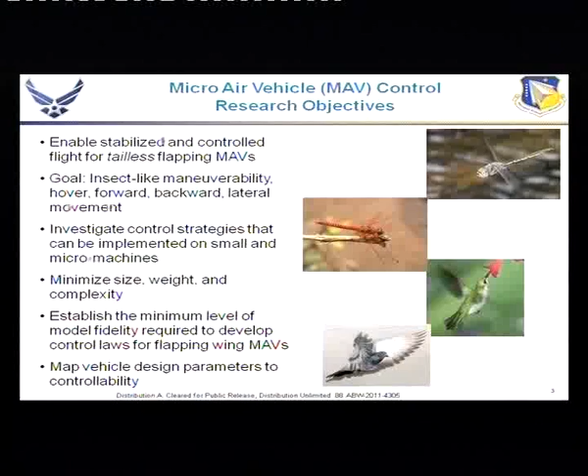One thing we as controls engineers have to keep in mind is that these things have severe size, weight, and volume constraints. When you want to implement your control system on such a device, you have to be very careful not to make it too complex. In fact, some of the low-level controllers we've developed so far have to make use of integer arithmetic, so all the complicated trigonometric functions have to be computed offline, coded in integer form, and make use of hardware multiplies and divides on board small chips in order to make it viable to fit within the size, weight, and complexity limit.

Another objective of our work was to determine the minimum level of fidelity needed to develop a control law for such a vehicle, one that performs well. We don't want coupled computational fluid dynamics or structural grids that take long times to compute. We're really interested in capturing the major effects and letting the magic of feedback control account for the uncertainties in the aerodynamic model. Finally, we want to map the vehicle design parameters back to controllability - that's also important.

So let's look at a couple of examples from nature to get a sense for how things fly. This is a video of a hummingbird here. You can see the majority of the wing motion occurs in a plane - there's a stroke plane defined by the wing sweep. Now, it's not to say there's no out-of-plane twisting. In particular, if you look at the twist of the wings, as the wing comes forward, the wing is twisted such that it has a positive angle of attack and is producing positive lift.

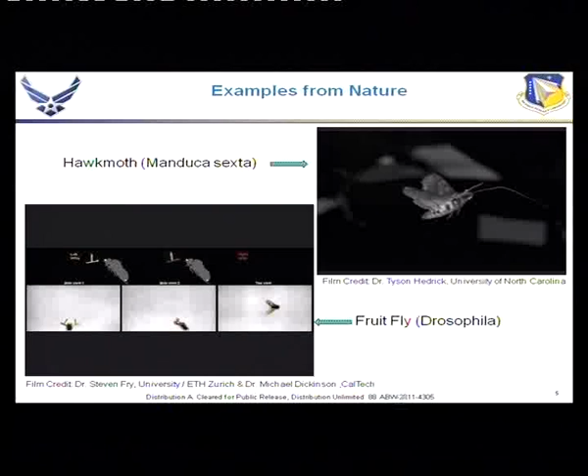That's another key feature of a flapping wing vehicle: the aerodynamic forces are oscillating, not steady. So any attempt to control a vehicle like this using a steady control idea is not going to work. You have to figure out a different way to handle this.

We'll look at a couple of examples of biomimetic flapping vehicles. This vehicle was built at Wright State in Dayton, Ohio, and it's not unlike the vehicles built at TU Delft, the famous DelFly, which was one of the first to take flight. This vehicle makes use of a clap-fling mechanism and is tail controlled. You can see a rudder and elevator here, and a throttle controls the speed of a DC motor, which controls the flapping rate. This aircraft is essentially flown just like an airplane by an RC pilot, except that the propeller is replaced by flapping wings.

So it might look bug-like, but it flies completely differently than a bug.

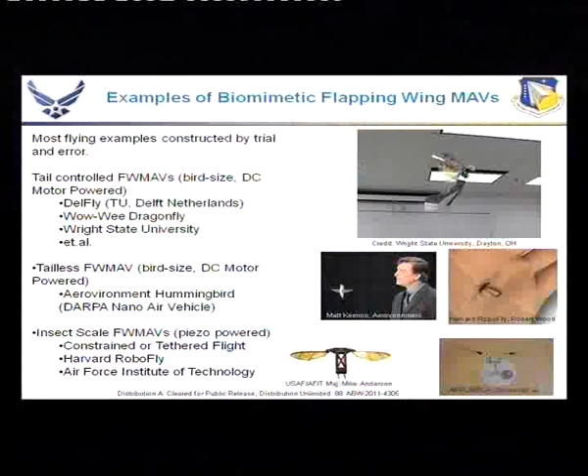Now, within the last year, a company in the United States called Aerovironment produced the first tailless controlled flapping wing vehicle, the small hummingbird here, shown with its creator Matt Keenon. This aircraft flies very much like a hummingbird.

The control strategy here is to change the angle of attack on the forestroke and the aft stroke. The wing will travel forward at a different angle of attack than on the aft stroke, and in that way you can create differential cycle-averaged drag forces to control the aircraft.

So there are several different ways of controlling aircraft. That's just one of them, and we'll talk about several of them today.

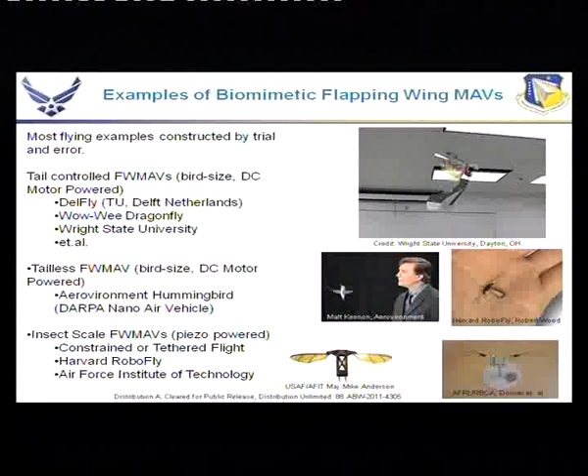I will note that this vehicle was designed largely using a trial and error approach, more reminiscent of Thomas Edison. They produced about 200 wings before they found a set that would actually work. Much of what we're doing is trying to put a more systematic and scientific approach in place, whereby we can design vehicles with different control strategies, sizes and shapes, without going through such an extensive trial and error process.

At the other end of the scale, we have the 60 milligram, 3 centimeter wingspan Harvard RoboFly. This aircraft is piezoelectrically powered, and we'll talk more about that shortly. This was the first aircraft to produce excess lift, and it did so on a tether, flying up a pair of wires without being controlled in any way.

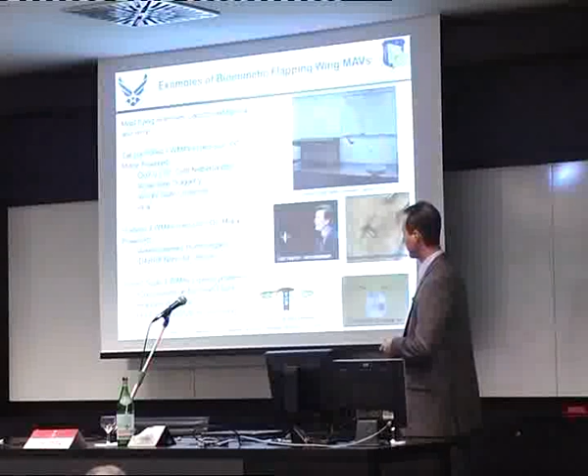Another aircraft we'll talk about at length is a 2-actuator version of this, wherein the wings can be independently varied. This is one that we built at AFRL, a mesoscale vehicle that will be undergoing air table testing for maneuverability as a precursor to free flight.

I wanted to talk about passive wing rotation because it's a key feature of many biomimetic flapping wing MAVs. One notable exception is the Festo SmartBird, which makes use of active twisting, synchronized with the position of the wings through sensors in the DC motor. But in the interest of keeping the design simple and preventing large inertia loads from an actuator moving in the wing frame, passive wing rotation is a good way to get around those problems.

So here you can see what passive wing rotation looks like, the general principle. The top picture shows how the Harvard RoboFly works.

It's basically a pair of two sheets of carbon fiber that sandwich a flexible material, and as dynamic pressure hits the wing, it bends, and it can't bend too far because there's interference between the two carbon fiber plates. So it works a little bit like a door that would be designed poorly such that it can only open up part way.

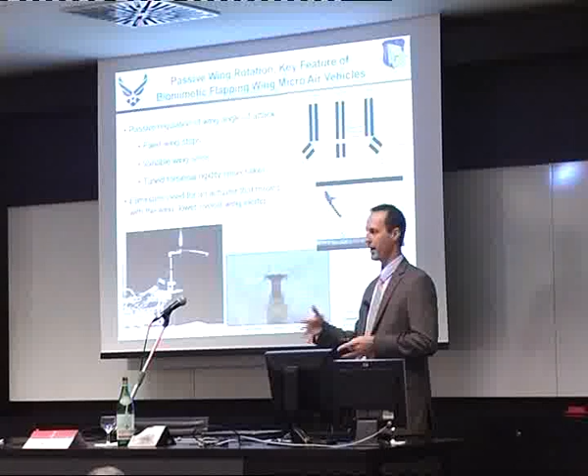But what that does, it gives you the ability to produce positive angle of attack on the fore-stroke and the aft-stroke and provide lift. You can see here another model on a test stand that's got this passive rotation component in it. This is video from our lab. And here's a video from the two-wing piezoelectric vehicle at EPFL under strobe light, so you can see the passive rotation working there.

All right, so let's look at the differences between flapping wing aircraft and conventional aircraft, like fixed or rotary wing aircraft. A typical flight control engineer is accustomed to having continuously variable control inputs that he can apply to his vehicle. They'll produce steady forces and moments. On the flapping wing side, a conscious decision was made to flap, and therefore you have nothing but periodic forces and moments to work with.

So as I said before, any attempt to control the instantaneous aerodynamic forces on these wings in order to control it is doomed to failure, because the aero forces are going to peak at roughly mid-stroke, and they're going to be very near zero at the ends of the stroke.

So at first this looks like an undesirable feature. However, before the end of the talk today, you will see how it's possible to control multiple independent degrees of freedom by controlling various parameters that govern the nature of the strokes.

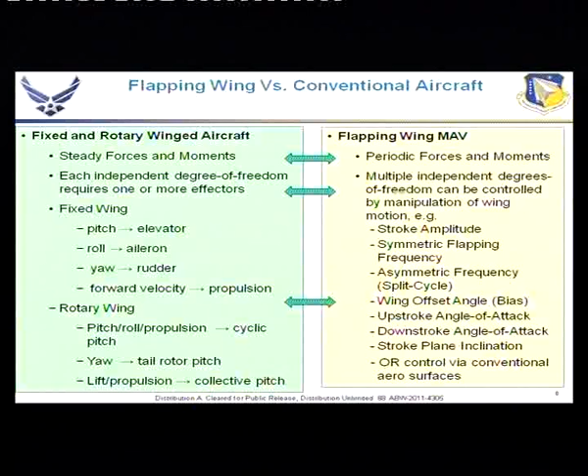So with conventional aircraft, every independent degree of freedom requires at least one actuator. Typically you have pitch controlled by elevator, roll by aileron, yaw by rudder, etc. On the rotary wing you have cyclic pitch on the rotor, tail rotor pitch, and collective pitch to control the vehicles.

All right, so the first thing that we looked at early on was the Harvard RoboFly. This was a piezoelectrically driven aircraft, and as I said, that was uncontrolled. It used a single actuator and just demonstrated the ability to produce excess lift.

So it was obvious that with a single actuator it would be impossible to control multiple degrees of freedom, but we asked the question, what if we split that actuator down the middle so that we have independent control over the left and right wings, and we leave the passive wing rotation joints in place?

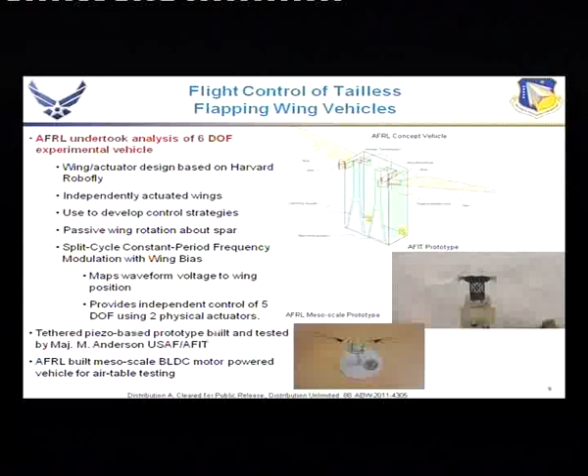So to give you some idea of how the thing works, the piezoelectric actuators are mounted to a carbon fiber substrate. So when you apply a voltage to this substrate, it induces a strain in what is in effect a cantilever beam, and it produces a relatively small tip deflection.

But this folded origami-like carbon structure is the equivalent of a slider crank type of linkage that produces a relatively large angular displacement for the wing for a relatively small tip displacement. So that's essentially how these things work.

And by independently actuating the wings, we looked at different ways of controlling the wings to see what we could do in terms of controlling the motion of the body of the aircraft. So this was our starting point.

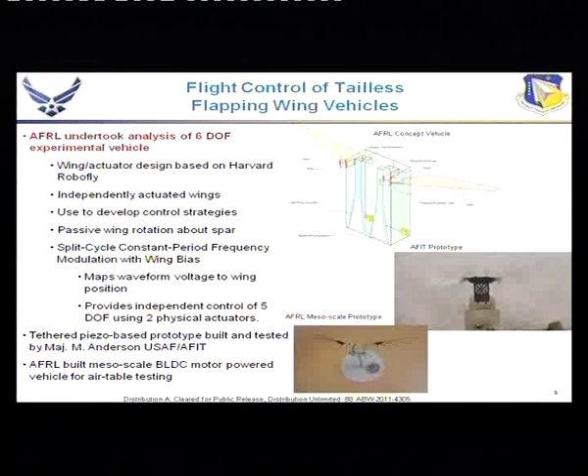And I'll talk today about one control strategy that we call split cycle constant period frequency modulation with wing bias. And you'll see how you could control 5 independent degrees of freedom using 2 physical actuators. So that's not to say that there's not more inputs to the system.

There are about 6 inputs to the system, but there are only 2 physical actuators in place that interpret the commands. We have a tethered piezo-based prototype shown here that was built up at AFIT based on this original concept. And then we have a mesoscale brushless DC motor-powered vehicle that we built at AFRL for air table testing.

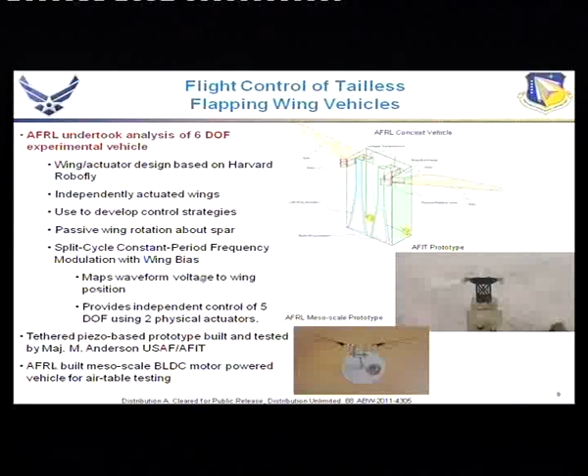Next I'm going to talk about control-oriented modeling. I mentioned earlier that aerodynamicists are very interested in these problems because there are a lot of unsteady aerodynamic phenomena at play—leading-edge vortex effects, wake capture effects, and many others. So the question is, how many of these effects, if any, do you need to model in order to develop a model that would be good for designing a control law?

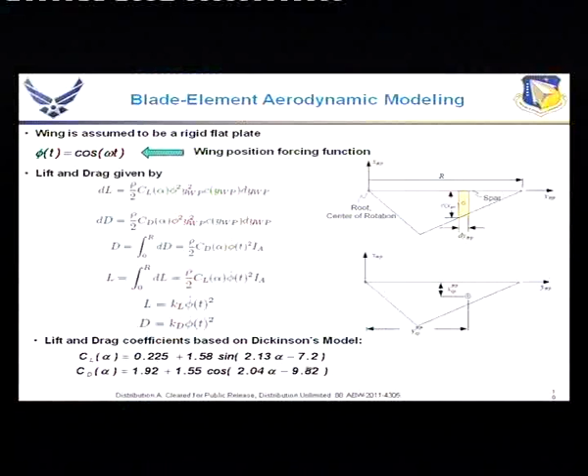So we start with one of the simplest forms of modeling, called blade element modeling. If you look at how blade element modeling works, you basically divide the wing up into an infinite number of strips, doing everything continuously with calculus rather than discrete approximations. The most basic oscillatory form for a rigid flat plate that's flapping would be a cosine wave. At the foremost position, the cosine would be 1, and at the aftmost position it would be -1.

Phi is the angle that the wing makes in the stroke plane. Blade elements near the root experience lower dynamic pressure than those at the tip, because tip velocities are higher—this is a rotational type of motion. You can look at the differential lift and drag across these blade elements, integrate them, and the lift and drag forces become proportional to the area moment of inertia of the wing about the axis of rotation. In terms of the motion parameter, they're proportional to the square of the angular velocity in the stroke plane.

At the bottom, we have lift and drag coefficients that are empirically determined from mineral oil tank tests at Caltech. These have been found to reproduce aerodynamic lift coefficients rather well for low Reynolds number flows. When they did the test, they used big plexiglass plates in a mineral oil tank, which aerodynamically scales to something small moving in air.

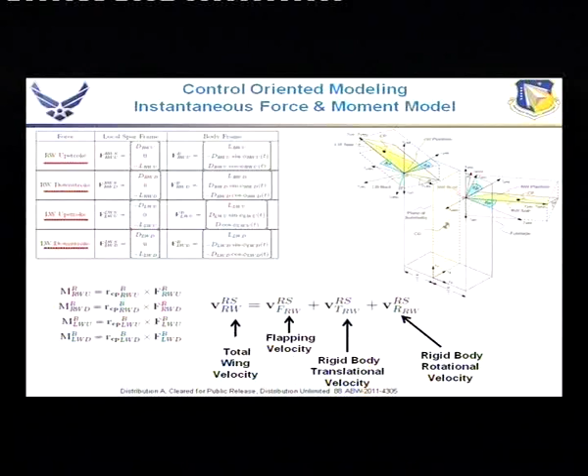If you were a flight control student, you would expect a flight control model with steady forces and moments acting on it. But when you're looking at flapping wing vehicles, the flight mechanics become quite different, because you have to consider the forces and moments produced by the left wing and the right wing separately from each other—there are sign differences between the two, and they can behave differently on the upstroke and the downstroke.

So here we have what constitutes an instantaneous representation of the blade element model, showing the X, Y, and Z forces in the body frame. In flight control, we like to translate all these forces back to a body frame and design controllers from there.

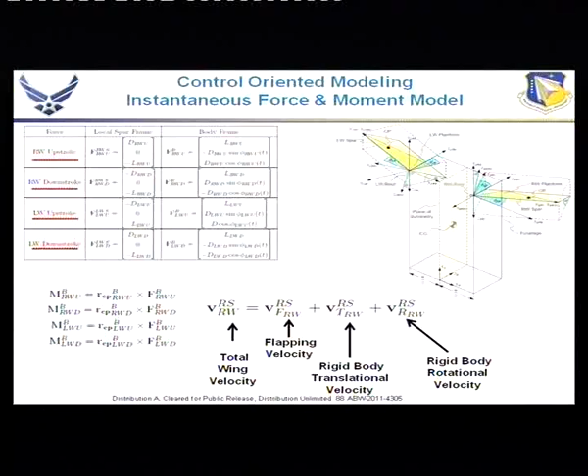One thing you'd notice here is that there are coordinate transformations involved—there's a sine of phi of t, but phi of t itself is a cosine wave, as stated earlier, its most basic form. So now you have things that look like sine of cosine of omega t, and later when we do integration to cycle-average these forces and moments, it gives rise to some interesting functions you don't normally encounter in flight control. The instantaneous moments, which are periodic, are just cross products of the position vector with the force vector.

We also include the effects of rigid body translational and rotational motion on the flapping wing motion. So not only are the wings flapping, but if the wings are moving forward with the body, you're picking up velocity components from that as well.

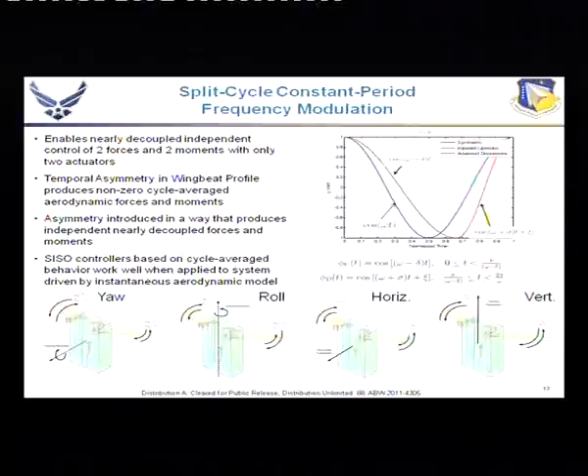If you look at what happens with the drag, the drag would be the same in the forestroke as the aft stroke, but in opposite directions, which means the cycle-average drag would be zero.

So the aircraft motion would exhibit a limit cycle. The aircraft would pop up twice per wing beat because of the lift, and for drag, it would move forwards and backwards, or lurch forward and stop, lurch forward and stop - those types of behaviors.

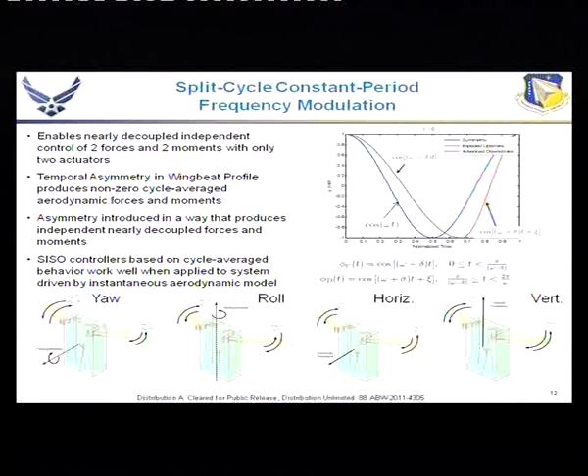Now, with just two physical actuators, we ask: what happens if we slow down one stroke relative to the other? You still get positive cycle-average lift - that doesn't change. But what does change is that the cycle-average drag becomes different, because the drag directions are opposite on the forestroke and aft stroke, but the magnitudes differ, since the dynamic pressure is different on the forestroke relative to the aft stroke. So temporal asymmetry in the wing beat profile can produce non-zero cycle-average forces and moments.

So if we look at the 4 degrees of freedom that could be controlled with two physical actuators: if you increase the flapping frequency, which we call the symmetric flapping frequency, on one wing relative to another, you'll get more lift on one side than the other, causing the vehicle to tilt.

If we look at the horizontal case, if you flap the wings hard on one stroke and slowly on the other stroke, you will advance further backwards than you will forwards. This would be like getting in a swimming pool and doing a hard backstroke and then a light forestroke without taking your hands out of the water.

Roll can be done the same way - hard forestroke, light aft stroke - but done differentially left to right. And for vertical force, you can just increase the flapping frequency to go up and decrease it to go down.

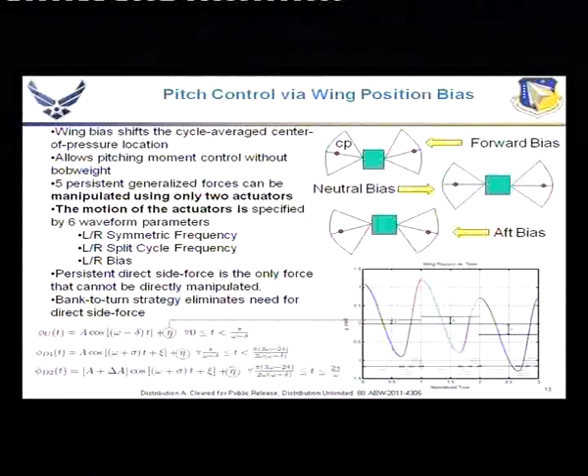By introducing this bias, the waveform that drives the wings now looks like an amplitude times the cosine of omega minus delta. Delta is the split cycle parameter that slows it down, and eta is the bias that changes the cycle-average center of pressure location. With a little bit of care, you can construct waveforms that are at least position-wise continuous, so you could actually implement such a thing.

So now the next step: we've talked about the instantaneous aerodynamic models, but remember that we can't control the instantaneous forces and moments. So we look at cycle averaging.

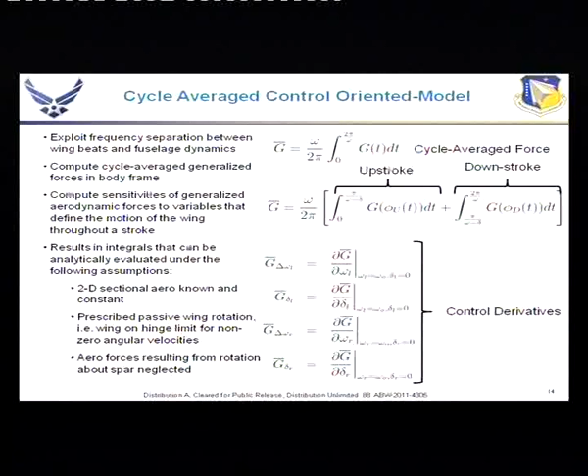Because there is quite a bit of difference in frequency between the rigid body modes of the aircraft and the flapping frequency, we do the cycle-averaging. So now you look at the cycle-average generalized forces, which are obtained by integrating an instantaneous aerodynamic force or moment over a wing beat and dividing it by the period. Because the upstrokes can behave differently from the downstrokes, you have to carry out the integration separately. But in the end you can calculate these integrals analytically, and I'll show one example of how to do it.

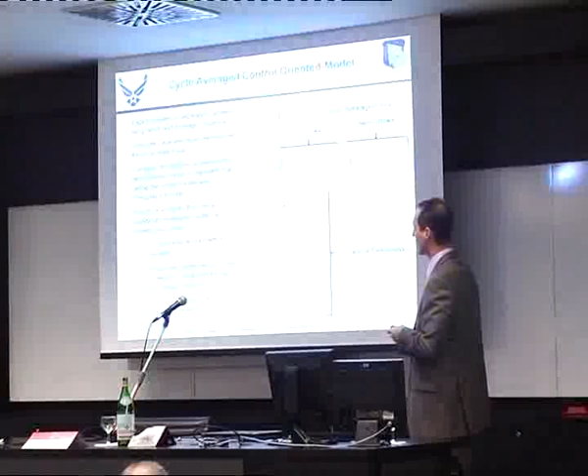You can analytically calculate the sensitivities of the cycle-average forces and moments with respect to the control input parameters available - here we have the symmetric frequency you can change, and the split cycle parameter, as examples. As I mentioned earlier in the instantaneous model, we have a lot of interesting functions popping up, like sine of the cosine of omega t, or the cosine of the cosine of omega t.

And it turns out that these give rise to Bessel functions and Struve functions. The Struve functions turn out to be zero, but the Bessel functions are non-zero. As you're carrying out these integrations, you'll encounter these unusual functions in flight control.

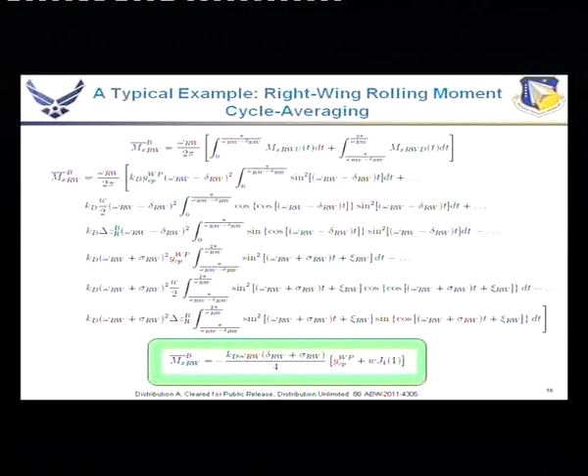So if we just look at one of the integrals, the cycle-averaged rolling moment produced by the right wing written in the body frame, there's the upstroke integral, the downstroke integral, the expansion of it. But in the end, the form of it's rather compact.

And what is nice about it is that the vehicle design parameters appear in it. So this YCP is the center of pressure location of the wing, written in the wing plane. This W is the width of the aircraft, and your control parameters appear here as well.

So now you have some equations that you can work with to see how you might change the design of the vehicle to make it more amenable to control. So it allows you to look at control early in the design process. Many people here probably suffered from people designing systems first without ever asking a controls engineer, and then coming back later and asking you to control it, and you've got problems. So it allows us to look at control early on.

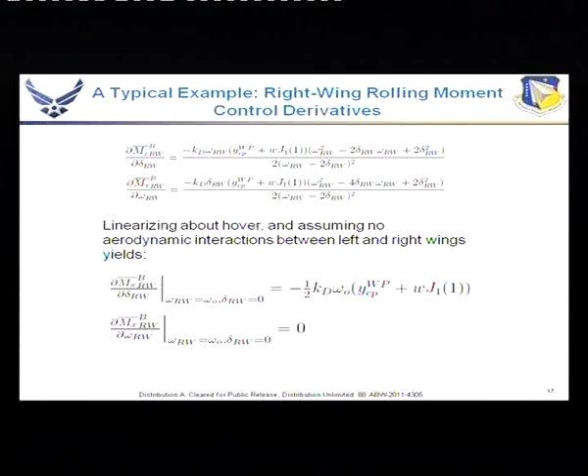To calculate the sensitivities is pretty straightforward. It's just the computation of the derivatives, and the end result gets even simpler if you look at a linearized condition about hover.

So if we get to the end, each one of those cycle-averaged control derivatives forms an element in your B matrix. So if you're accustomed to linear control, you like to know what's in your B matrix, and at least you want to get the sign right, because if you don't have the sign right, the feedback loop will have the wrong sign. You could be destabilized.

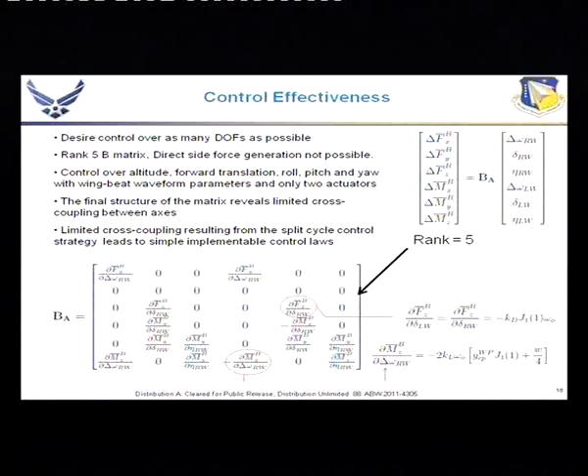So this B matrix here effectively tells you what the changes in the cycle-average forces and moments are relative to changes in the symmetric frequency, the split cycle parameter, and the wing bias associated with the left and right wings.

And one thing that we can see from this matrix, it turns out by inspection you can determine that it's rank 5. One good thing about the matrix is that it's relatively sparse, but not too sparse, which means that there's a lot of input decoupling here.

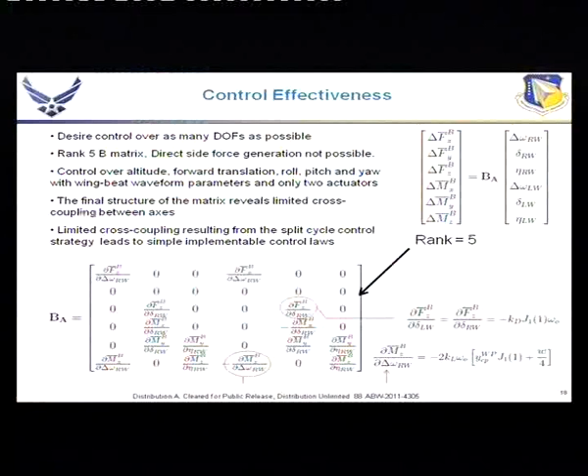This control strategy yields a lot of input decoupling, and so that means that the control law doesn't need to be as complex as it might have to be for something that chose a different control strategy. Everything here is written in terms of the right wing because there's some symmetries and asymmetries due to left and right. But again, the Bessel functions and the design parameters show up in each individual element here.

There are 36 elements, but you need to calculate 108 integrals in order to get your 36 elements. So it's a rather involved process, but we believe worth it in the end.

The one row of all zeros means that you can't control the cycle-average side force on the aircraft. So that's one thing that you couldn't do. But it really doesn't matter, because if you want to maneuver in the lateral plane, you can always roll and translate, or bank and translate. So you can have a higher level control loop taking care of that.

So once you have such a model, we'll look at how you might implement a controller for something like this. And the easiest thing to look at is a very simple one degree of freedom altitude tracking problem here, and looking at what the physics are.

This is basically the Harvard RoboFly on the pair of wires that moved vertically, and this is modeled by a point mass with just gravity acting on it, and a time-varying lift force. So this lift force has the form of sine squared omega t. Sine squared omega t has two positive peaks in it, indicating the two bursts of lift that you get at mid-stroke.

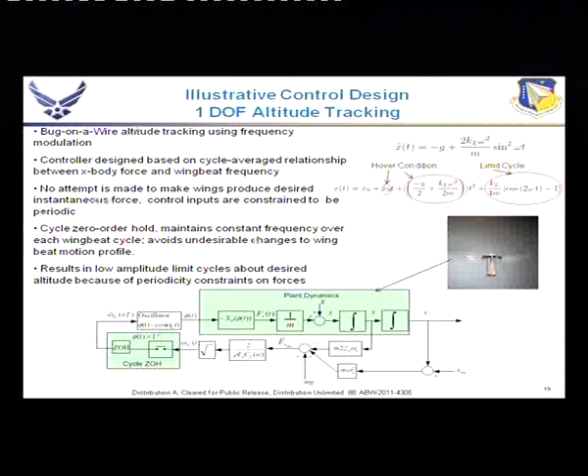If you look at the analytic solution to the differential equation, you can see that the aircraft will stay in the vicinity of its starting point if certain conditions are met. One of them is that the initial velocity is 0, and the other one is that the cycle-average lift is equal to the weight. This term circled here is a statement that cycle-average lift equals weight.

The one thing that all the cycle averaging doesn't tell you anything about is what do the limit cycles look like.

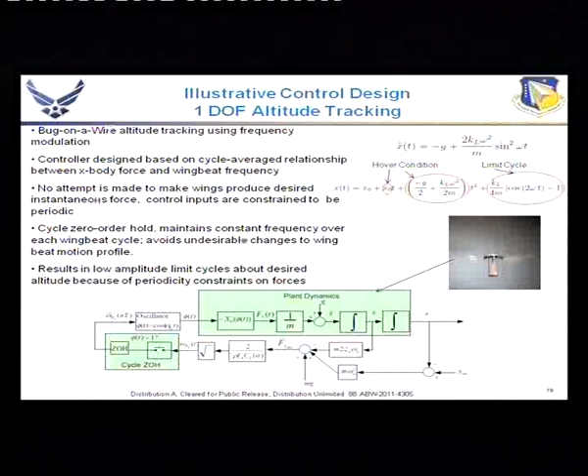And the limit cycles in terms of position have the form of cosine of 2 omega t. Again, you get two positive bursts of lift that cause that. So let's look at what you would do if you wanted to control the altitude of this aircraft on these wires. If we had the ability to measure the altitude rate and the altitude, we could, in concept, produce a control law that turns this double integrator plant into a damped harmonic oscillator.

And that's only if we could produce a steady force. But we can't produce a steady force, as we said before. But there is a mapping between the cycle-average forces and the form of the waveform that's oscillating the wings. And that's what this block diagram is basically doing, inverting the relationship between cycle-average force and frequency. Again, there's a quadratic relationship between this cycle-average force and the frequency of the wing, and that produces a

oscillator frequency command. Now, there's a cycle zero order hold in place, and as opposed to a conventional zero order hold that works on a fixed clock, we look at where the wing beat is in the stroke plane, and we only update the frequency to the oscillator once each wing beat. And in the end, you produce a frequency command to the oscillator that drives the wings, that produces an instantaneous force, but it has a cycle-average force that satisfies one of your necessary conditions for hover.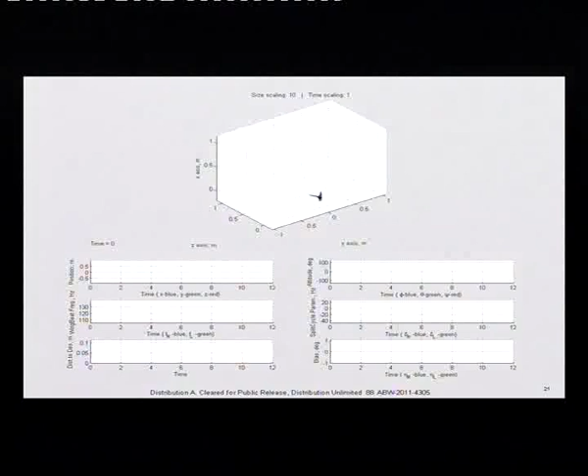So this is a simulation of a flapping wing vehicle. If you listen closely, you can hear something that's buzzing. That's the waveform that's being applied to the actuator, piped through the MATLAB sound generator. And there's really no modifications made to that. It was interesting to hear it because it does sound a bit like a bug. There's kind of a warbling sound and a buzz going on.

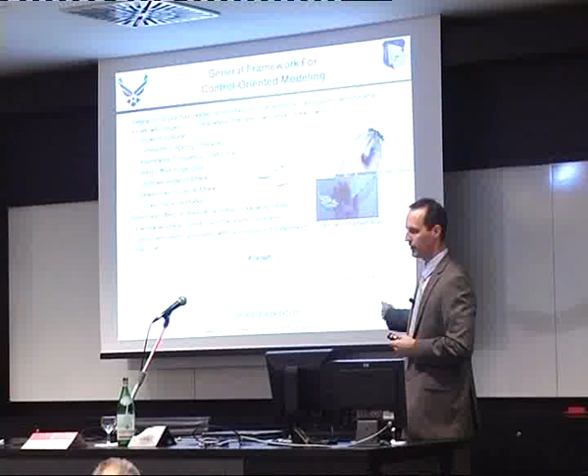But in this case, the cycle-average control model is being applied to a model of the vehicle that's being influenced by the instantaneous forces and moments. So we're not really testing the controller on the same thing that we designed it for. It includes the periodic effects of the forces and moments. So this is basically the first step in validating that such a controller would work. Incidentally, that simulation also included some unsteady aerodynamic effects. We have what we call phase index table lookups that account for differences in the lift and drag coefficients throughout the stroke. So some of the unsteady aero is included in that as well.

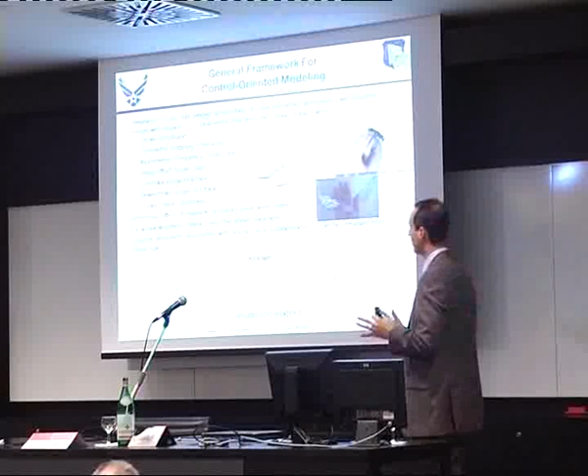We have now generated a general control framework for control-oriented modeling in that we haven't just looked at the split cycle, the symmetric frequency, and the bias, but we've also looked at the effects of changing stroke amplitude, upstroke and downstroke angle of attack, and stroke plane inclination. And many different implementations of flapping wing vehicles have been proposed. Here's another variant of the RoboFly where the line of centers of the linkage is changed. And the effects of these actuators can cause different types of behavior in changes in the amplitude, bias, angle of attack, etc. And you might not have direct control over these parameters. Some mechanism may be in place to take care of it.

So we have gone through and calculated cycle-averaged control derivatives for amplitude, frequency, split cycle, etc. And a lot of work went into that. So many integrals were calculated and many derivatives were calculated analytically. But if you go to a new design that hasn't been conceived before, there are geometric relationships which tell you how the amplitude might change with respect to some servo control input, or how the frequency might change, or the split cycle parameter could change. And those are design dependent.

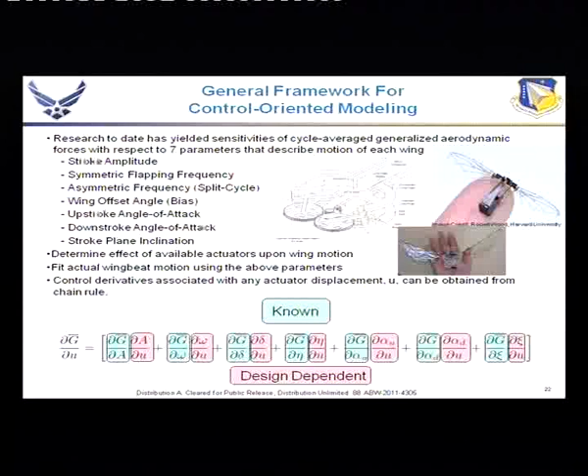They can be computed as a secondary process. Usually they're just geometric relationships, and you can get them. But by using a multivariable chain rule, you can compute the change in the cycle-average force or moment relative to any type of control input you might have at your disposal.

Another thing that came out of the work so far is what should the designer of a flapping wing vehicle be looking for in terms of controllability? This goes back to the problem of thinking about controls last. We need to think about that early in the process. And so some very simple necessary conditions fall out of the work.

It basically says that the cycle-average lift has to be equal to the weight, and all the other cycle-averaged forces and moments have to be equal to 0 in order to stay near the equilibrium point. So what you can do when you're designing a vehicle is to try to enforce as many of these things as possible for your neutral control condition. This is like trimming an aircraft.

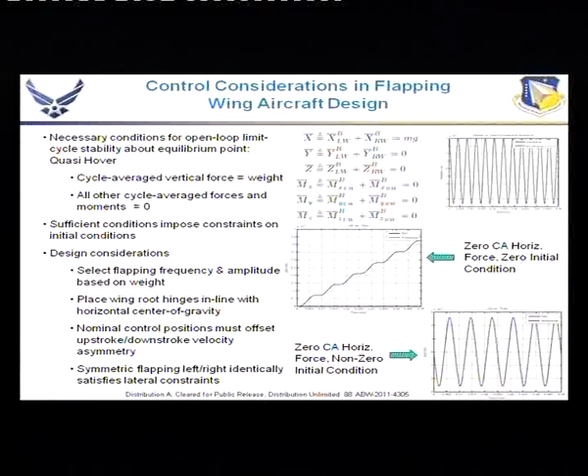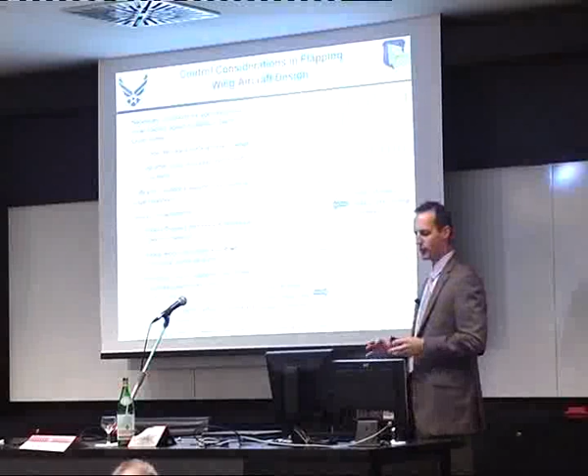You can select your flapping frequency and the amplitude of the flapping based on the vehicle weight. Another thing that you can do is to place the wing root hinges in line with the center of gravity. That way, when the aircraft powers up, it doesn't have an immediate tendency to tilt or pitch forward and move away from equilibrium.

And the nominal control positions have to be offset in order to compensate for any upstroke or downstroke velocity asymmetry. We talked mostly today about the piezoelectric powered aircraft, but when you have DC motors driving 4-bar linkages or nonlinear linkages, you can get different velocities on the fore-stroke versus the aft-stroke if you run the motors at constant speed. So in those cases, you need to compensate for the velocity asymmetry for trim using other mechanisms.

All right, so these are some results that were produced at Wright-Patterson Air Force Base at the Air Force Institute of Technology. These show the piezoelectric actuator driving a wing, and if you look closely, you can see that the wing is going faster on one stroke than the other. This is a strobe type of video.

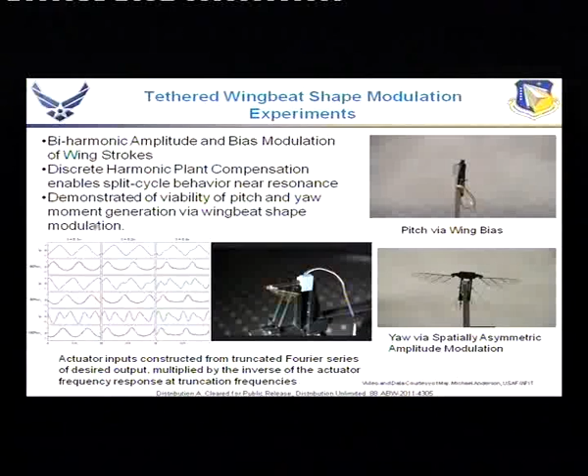Now in order to make this happen, it was not a trivial process. One of the things that cropped up was that we found that when we drove a piezoelectric actuator in a wing with a split cycle waveform, we could only reproduce the split cycle motion up to about 1/5 of the first bending mode, or the first natural frequency of this combined mechanical-piezo system. What happens is the split cycle signal has multiple Fourier components, and the higher order modes will get amplified by the resonant peaks in the piezoelectric actuator's frequency response.

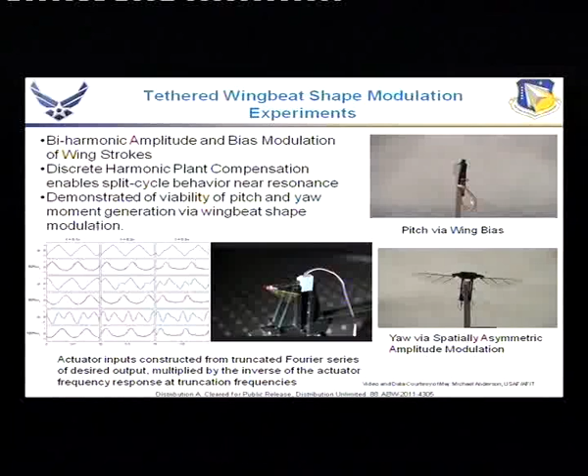So what was done here was to look at the frequency response of the actuator and produce an input that, when applied to the actuator, produced a split cycle motion. This is done by inverting the magnitude at two discrete frequencies. So we keep two Fourier components of the split cycle cosine wave and invert the magnitude of the frequency response, and adjust the phase to compensate for phase differences between the transfer function of the actuator at those two discrete frequencies. And you can do what's called discrete harmonic plant compensation.

So if we look down here, you can see these waveforms being applied to the actuator. Right here is an input, and it looks nothing like a split cycle signal. However, the output of the plant, when this signal is applied to it, looks like a split cycle signal. All right, so it's not really a pole-zero cancellation per se. You're shaping the input in such a way that you produce the desired motion in the output.

These are the first tests of some of the control strategies that we talked about today. The top one here is going to show wing bias. This thing's tethered and constrained to rotate only about that pivot point. But here in a second, you'll see the wings shift backwards. Okay, here you can see the cycle-average CP moving backwards. Here it's moving forwards and it straightens up.

Down here we're doing amplitude modulation, differential amplitude modulation on the wings, left to right, and you can produce this yawing motion in that fashion. So other tests were done on this vehicle on a force balance. The trends that we expected from the cycle-average analysis did show up.

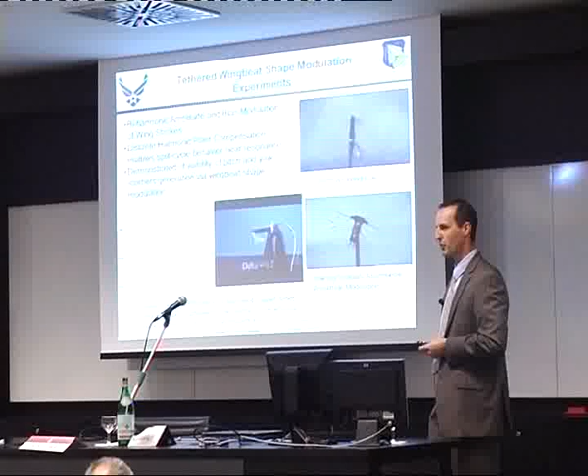The amplitude of some of the forces were near the noise floor of the sensor that we had. It's one problem that just about everybody has with these small flapping wing vehicles—the forces are so small that we just don't have force balances adequate to measure it. You see a lot of statistical variation in the results, but the trend lines, the slopes that we expected, are there.

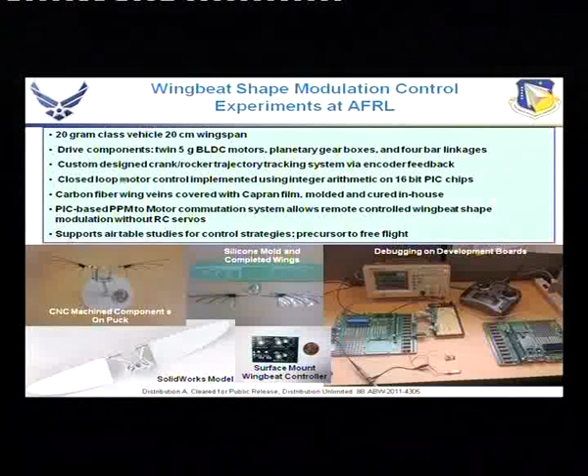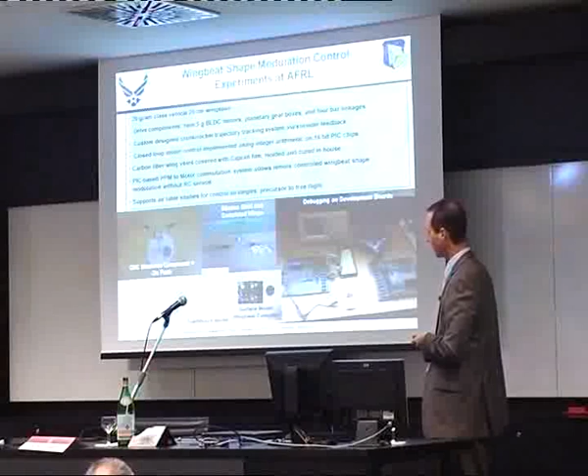A couple things we didn't expect are also there, like side forces being produced by span-wise flow over the wings. We also have an air table experiment we're working on. This shows some of the work—we've developed new methods for producing carbon fiber wing structures using silicone molds. We do development of the motor controllers, in this case brushless DC motor controllers, on these development boards, and reduce them down to surface mount configurations.

That we can put on a puck and slide on an air table to get around some of these force balance issues. We want to really just test what's the quasi-steady motion of the vehicle under the influence of these flapping wings with changes in split cycle and frequency.

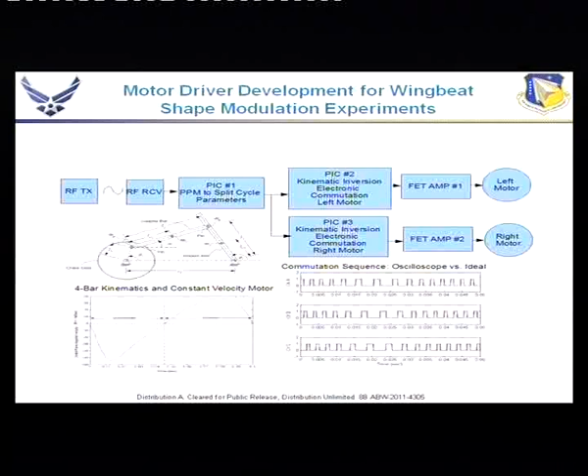One of the other details here goes back to the issue of having 4-bar linkages and motors driving them. If you look at this 4-bar linkage driving a rocker arm to flap the wing, and you applied a constant voltage to a brushed motor or a constant pulse width modulation signal to a brushless DC motor, you'd find you would produce an asymmetric velocity profile—velocity is a little bit lower here than it is here.

So in order to trim this vehicle up, the brushless DC motor has to be driven in such a way as to invert the kinematics of the linkage. If we look at the pulse train driving the motor, you can see it's stretched and compressed here, and that is done to invert the linkage kinematics so we can produce the right root rocker motion.

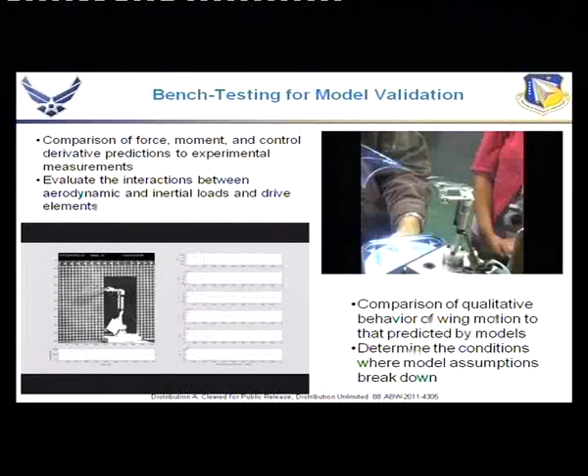While aerodynamicists have long been intrigued by the unsteady aerodynamic phenomena at play, there's also significant structural phenomena at play. You're actually getting larger amplitudes and more speed at the ends of the stroke than you would have predicted using blade element models. These are things your control laws are going to have to be robust to—the effects of structural dynamics, particularly on these flight weight vehicles.

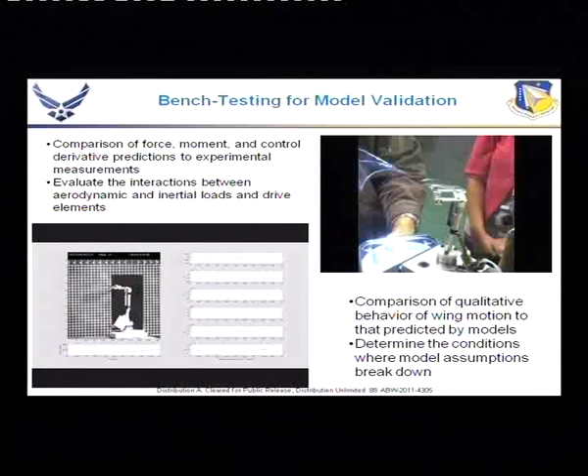If we look at this high-speed video of another one of these wings, you can see the passive rotation, and some out-of-plane motion as well. All these things come together to produce a problem for controls engineers—they need to make robust control laws, but they have to be simple enough to implement on these small vehicles.

We took some time to look at the interactions between the flexible flapping wings and the drive mechanism. These primarily become issues at what I call the mesoscale, where you have brushless DC motors rather than piezoelectrics driving things. It turns out there are pretty significant interactions between the drive motor, a flight weight drive motor, the gear train, the 4-bar linkage, and this flexible spar.

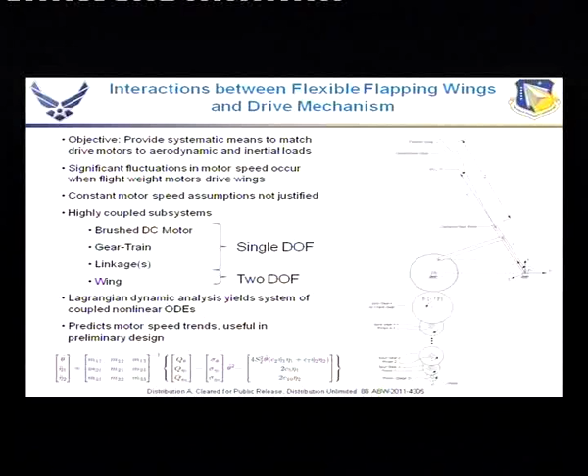We took the time to derive a system of nonlinear ordinary differential equations for this system using a Lagrangian technique. Part of the reason was we wanted to offer a tool for designers to match the motor to the loads that would be encountered—that's not a trivial problem either.

Here shows one of the interesting things we observed—this is a high-speed video, 2,000 frames per second, of a DC motor linkage driving a spar, just the spar, no wing. What's striking is that at about mid-stroke, that spar appears to stop, or come very near stopping. That's really what prompted the study on the interactions. What's actually happening is the first bending mode of the spar is excited, and at the end of a stroke, you're getting this maximum deflection and strain energies building up.

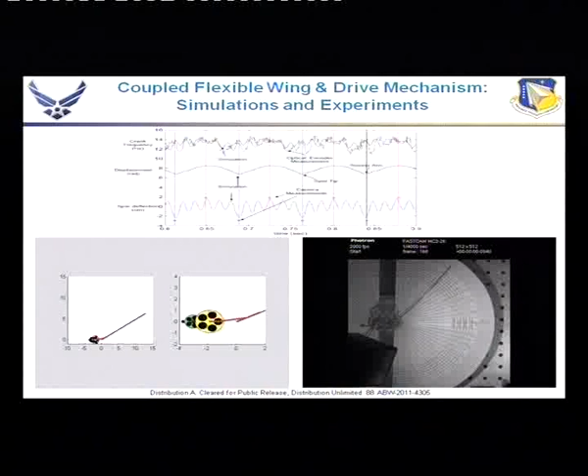The rocker arm's pulling it forward, and then at some point the motion of the spar starts to reverse, because there's a difference between the frequency of the drive and the natural frequency of the spar. So the spar is going backwards at the same speed the rocker's going forward, and the net motion is practically zero. This is important because dynamic pressure governs the aerodynamic forces and moments on the vehicle, and if this sort of behavior exists, it's something you want to know about.

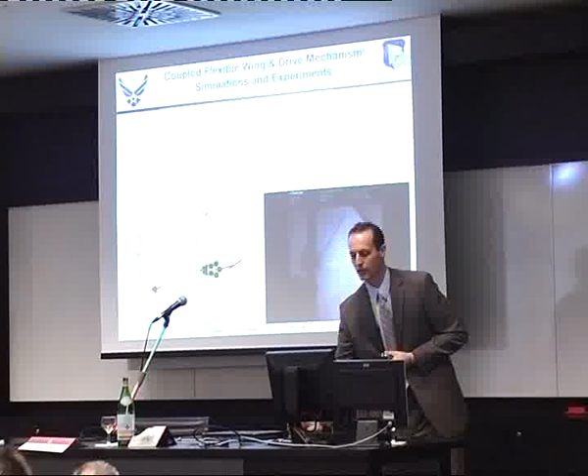This shows a simulation of the same phenomena. One thing I'll call your attention to is near the stroke reversal on the audience's right, you'll see that green gear slow down.

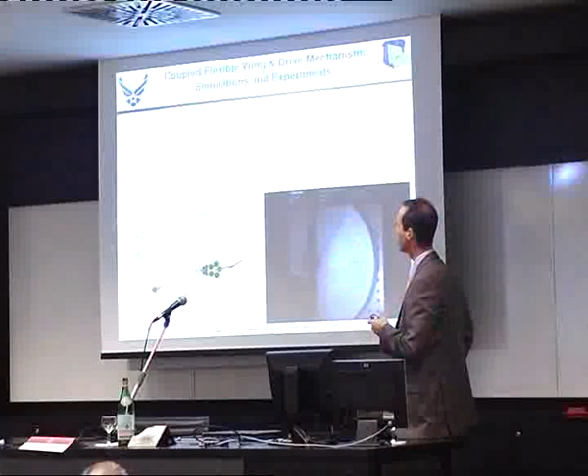That is a result of the limited torque of the motor. The motor really doesn't have enough power to drive the spar at a constant speed. So not only do you have strain energy interactions here, but the torque limits of the motor cause the motor speed to vary as a function of time. So applying a constant voltage to a motor does not imply you'll get constant speed out of it under loads like this.

And we did some painstaking work to match all the physical parameters to get representations of those in the simulation. We got a validation of that model. So this is the crank frequency up here, it's varying as a function of time. You can see the encoder outputs, and you can see what the spar deflection looks like as a function of time compared to our camera measurements, some spot camera measurements here in the red and the blue.

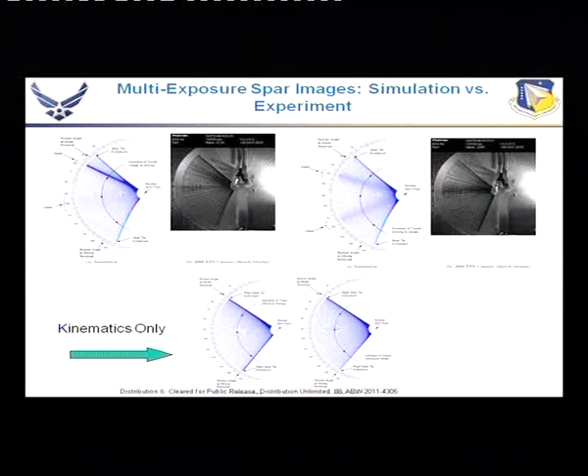If you slow everything down and look at what the spars look like as a function of time, that's rather enlightening as well, because what you see are some dwell points, lots of spars stacking up on each other in different positions. If you compare that with just the kinematic representation, there's quite a bit of difference. There's about 10 degrees of extra amplitude just on one side, and that means you're getting extra speed out of the stroke toward the end. So there are some areas where you're getting more force out of the wing than predicted, and several areas where you're getting less force than predicted.

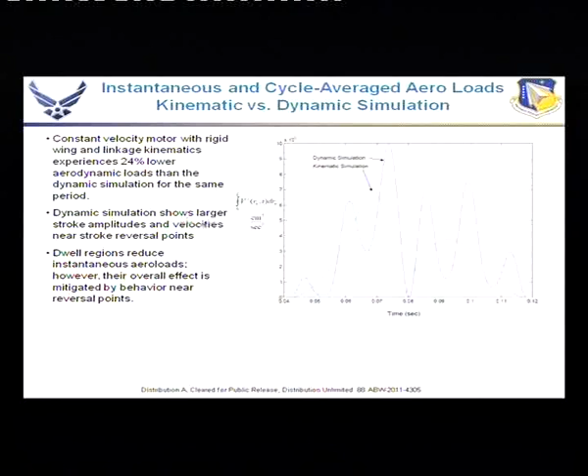This plot shows a representation of what the aerodynamic forces look like on the wing under the pure kinematic case, shown in green, and in the dynamic case with the spar dynamics included. You can see there are places where the aero forces are lower than the kinematic case, and cases where they're higher. But in the end, it turned out that the kinematic aero forces are about 24% lower than those experienced by the dynamic system. So the inertial loads causing that spar to deflect more actually buy back some force.

One of the other things I wanted to mention is that there are examples in nature showing insects drive their wings near resonance. As an insect drives its wings at resonance, it's not wasting any energy reversing the inertial loads. It's putting all its energy into the aerodynamic forces, and that's one of the features we wanted to preserve with the split cycle constant period frequency modulation.

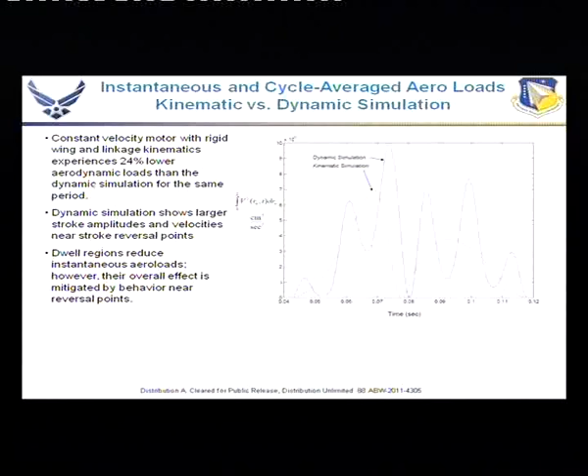The constant period piece came from wanting to keep the wing operating near resonance. With the discrete harmonic plant compensation method we discussed earlier, you can operate the wing all the way up to resonance by using the input shaping we discussed. This is the sort of behavior you can expect if you're not operating at resonance. We have not been able to find a pairing between a flight weight wing and a DC motor combination where you can operate that whole system at resonance just yet. So that's one of the things we want to look at in the future.

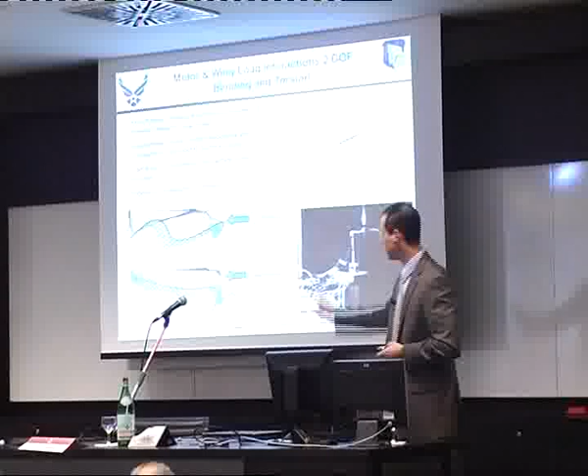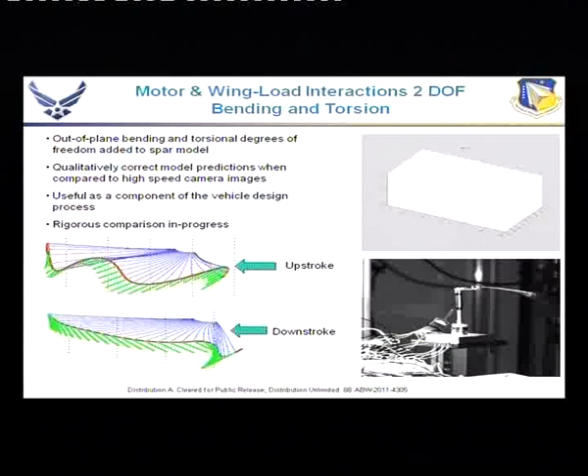We also have done some modeling that gives you what the out-of-plane bending and torsional degrees of freedom look like. Here's a simulation of that up here. Down below, we see a 3D dwell plot, what I call a 3D dwell plot. The green represents the chord, and the blue represents the spar. But again, you see the twist and the out-of-plane deformation here, even on the model.

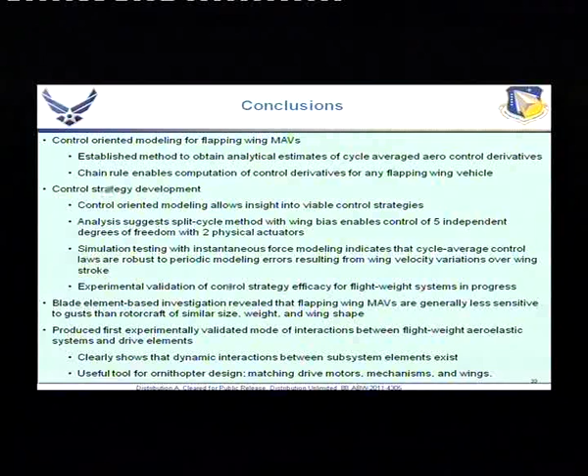Rather than reiterate everything I've shown today, one of the most striking things is that it looks promising that we'll be able to control 5 independent degrees of freedom with 2 physical actuators. At least from the aerodynamic point of view, that looks viable. The effects of inertial loads on the wings is open to discussion, and that's what we hope to find out when we conduct our airtable tests later this year.

The force balance tests with the piezos were showing the correct trends that we had expected to appear, so that does look viable. The other key is that we try to keep everything analytic so that we can make direct ties between the design of the aircraft and its controllability.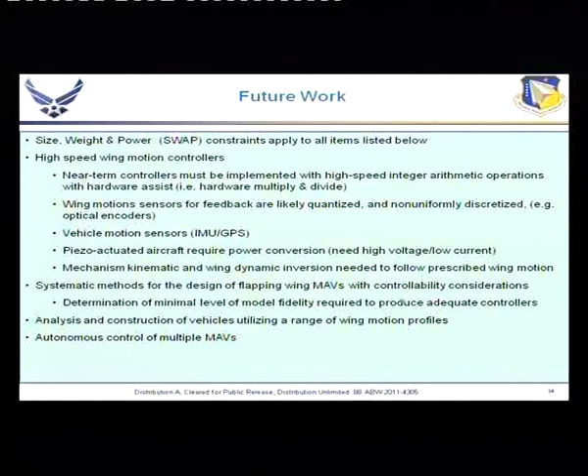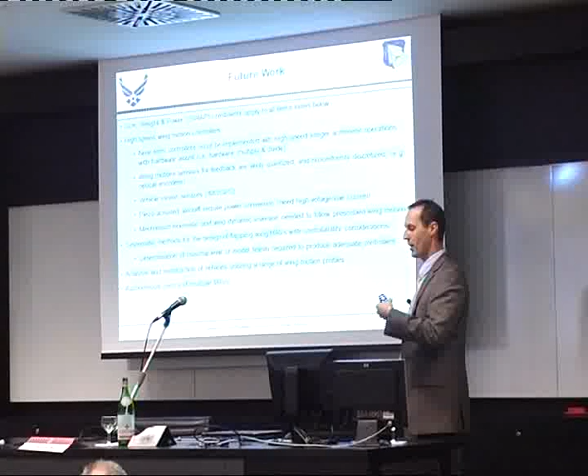For future work, the biggest problem is probably size, weight, and power. Everything we put on board has to be small, and it can't be very complex. At least in the near term, until we get more sophisticated computational capability in small packages, our controllers will have to be implemented with high-speed integer arithmetic operations with hardware assist. Even on these DC motor-powered vehicles that aren't flapping that fast, you're talking about making decisions on the order of microseconds about what to do to apply a voltage to an actuator.

The wing motions for sensor feedback on the hockey puck version are measured by encoders. These are not very nice devices from a feedback control point of view because they're quantized both spatially and temporally, which complicates the controls.

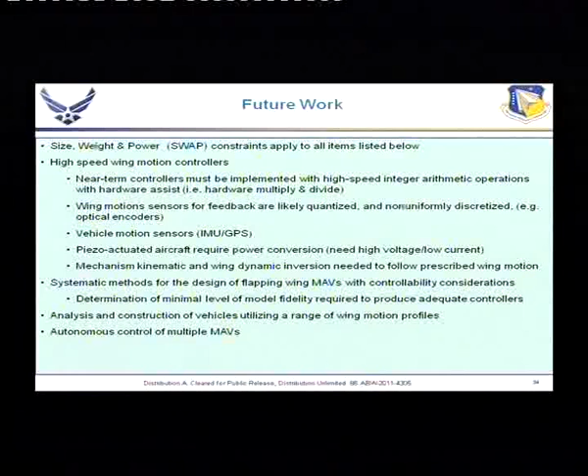The vehicle motion sensors for something working in free flight with a stability augmentation system will need very small inertial measurement units, perhaps small GPS, to fly them. We may be able to get them on a mesoscale aircraft, but getting them down to something that fits on the end of your finger is quite another story.

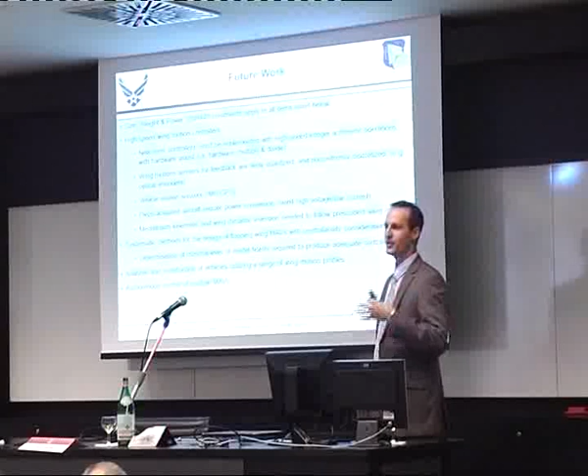The piezoelectric powered aircraft also require power conversion. The batteries we have today are small, but they're low voltage, high current devices, and a piezo needs exactly the opposite. So you need some lightweight power conversion on board.

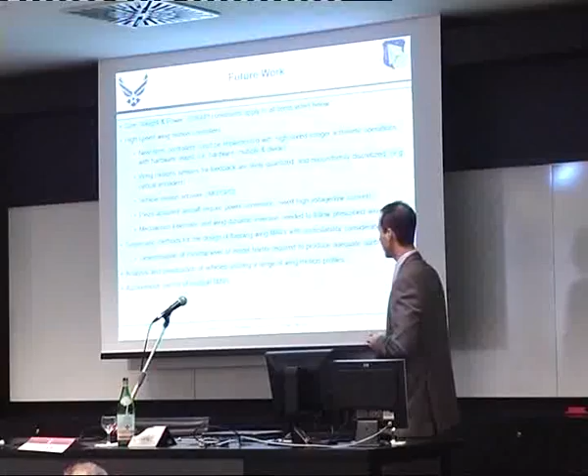We need systematic methods to design flapping wing MAVs with controllability considerations, and in particular, we need to determine the minimum level of fidelity required to produce adequate controllers. I think we'll answer a lot of that with these airtable experiments and force balance experiments before we go to free flight. If you put an RC pilot in the loop, they could probably fly it, but if you want to do it autonomously, it's going to require some extra work.

So with that, I'll conclude the talk. I appreciate your attention.